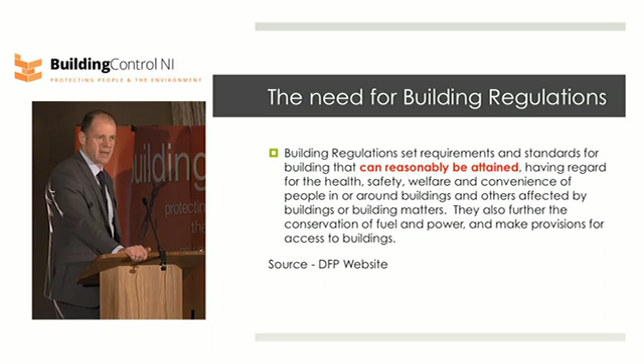So in terms of the need for the regulations, gospel according to the DFP - sorry Seamus, I know you're here with us today - but this is what the DFP say about the need for regulations. Building regulations set standards and requirements for buildings that can be reasonably attained, having regard to the health, safety, welfare and convenience of people in and around buildings, etc., etc., etc. It all reads very well, but there's one line I possibly have a bit of an issue with, and that's the bit that says 'can reasonably be attained.' That's a huge challenge for us in building control. It's a huge challenge for the construction industry - when do we be unreasonable, and when do we go into that area of being unreasonable? And that is very much subject to personal viewpoints as well.

I think we all understand the DFP definition, but it doesn't necessarily roll off the tongue very easily. What I'd like to do this morning is make this simple, because I think when you simplify things you get a better understanding and they stay with you better. So I'm going to look at the regulations in terms of three key steps.

Number one, buildings should be safe. By safe, the first thing I mean is they should be structurally stable. They should be safe in the event of a fire, and in terms of fire risk, those in the industry will know that over the last number of years, thankfully the numbers of people dying as a result of fires in buildings has reduced, but it's still up there at about 400 people per year.

Changes in the regulations over the last number of years have no doubt contributed to the safety of buildings. We provide heat and smoke detectors, we provide adequate means of escape, we ensure that materials within buildings are resistant to the spread of flame. Buildings are no doubt safer places because of the regulations, but there's still some way to go.

Even think of your own house at home, depending on the age of your house, it used to be none of your bedroom windows needed to be what we call escape windows - ones you can open fully to get out if there's a fire. The regulations introduced a provision that there should be one bedroom window that is an escape window. Now houses are built with all bedroom windows being fully escape windows, so much, much safer places to be for us all.

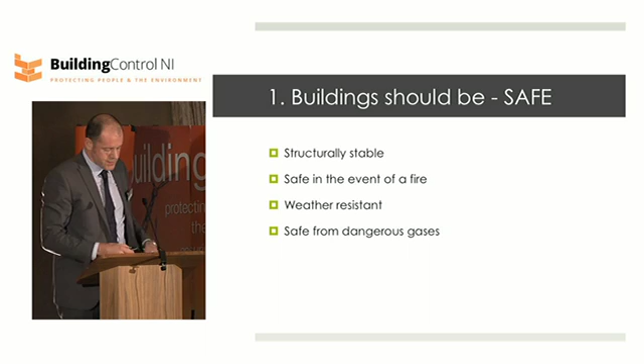The other one is carbon monoxide, and I think the whole issue of carbon monoxide detectors probably explains the benefit we have in building control from having strong elected member involvement. I think it was only for the involvement of elected members that the requirement to have carbon monoxide alarms is now provisioned within the building regulations.

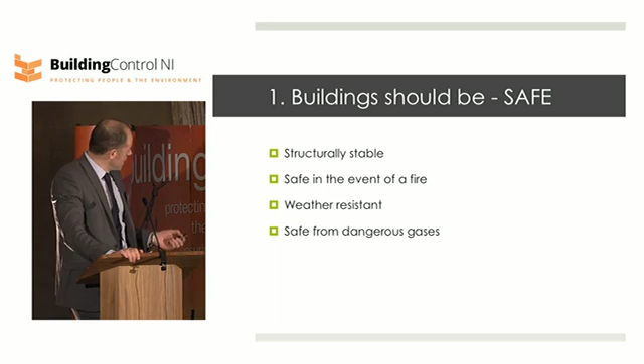What isn't in the regulations at the minute is that buildings should be safe from dangerous electrical wiring. Now that is a provision within the regulations across the water. We have resisted this for years in the north. Personally, I think it should be part of the regulations here, but that's just my personal view.

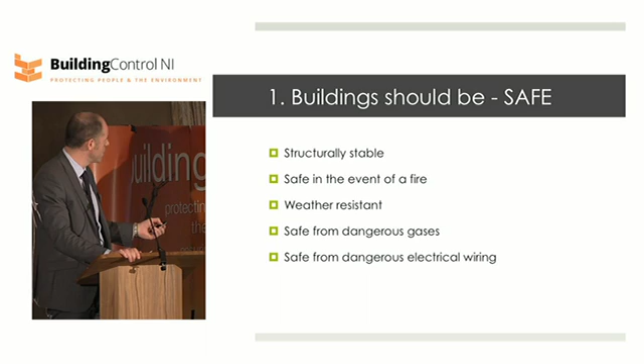Secondly, the second key point I'd like to make is that buildings should be accessible. Stairs, again, a huge source of accidents within the home - numbers running at about 500 deaths per year as a result of falls on stairs. That's a huge number, and it's quite hard to believe that 500 people are dying each year because they fall on stairs.

Regulations have improved the safety of stairs. Stairs, we would feel, are now much more gentle - the goings are longer, the rises aren't as high, stairs are not as steep, and they're wider than they used to be. But that figure is still way, way too high. There may be other contributory factors, but regulations have certainly helped make stairs safer in the home and in other buildings.

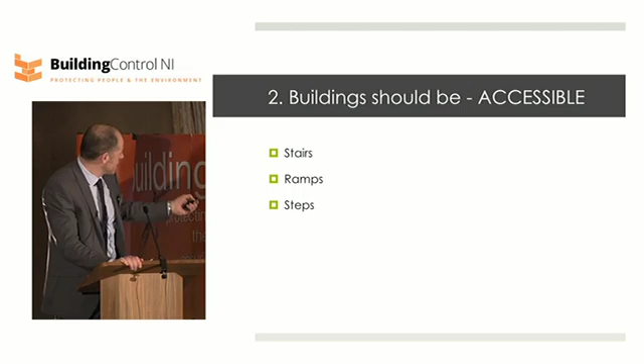Again, steps are more gentle now than they were. Guarding is a provision within the regulations. You don't need to be a genius to know that when you have a fall from the first floor down to the ground below, you need to protect that. You don't need the regulations to tell you that, but when architects come in with different materials that are aesthetically pleasing, regulations will tell you the strength and thickness this glass needs to be.

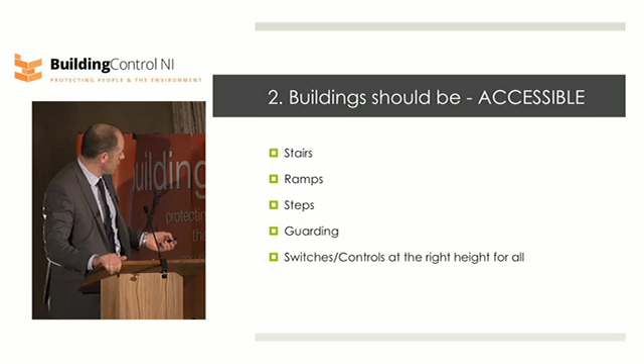So the regulations, while it's not obvious that it's needed for that solution, will keep you right and keep the home safer. Nowadays in buildings, our switches and controls are at the right height for everyone, and I think we'll all agree that's a good direction of travel, so those with mobility impairments can operate switches and controls the same way as all able-bodied people do. And finally, toilets and showers within our homes and buildings are now usable by all.

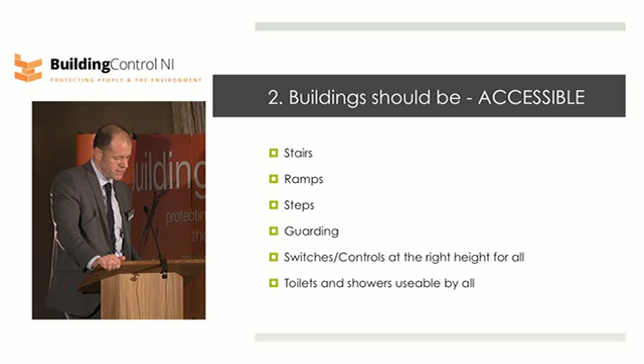I think we all probably know someone who has had to get their house adapted because of changes in their life. Unfortunately, because of some of the illnesses that are out there, people who require these adaptations don't even ever get to see them being built. I think that's been a problem historically, that the standards weren't good enough, and years ago we weren't building to the proper standards. The concept of lifetime homes, there's a lot to be said for that.

Energy efficiency, increasing cost of heating our homes. Even on the radio this morning, those of you who listen to Radio Ulster, our famed radio presenter has been running a few sessions of late regarding the struggles people have just to heat their homes. Deaths due to hypothermia have doubled in the last 5 years. Over three-quarters of people admitted to hospital with hypothermia are over 60. This is a real issue in society, and building regulations have helped to make our buildings more energy efficient.

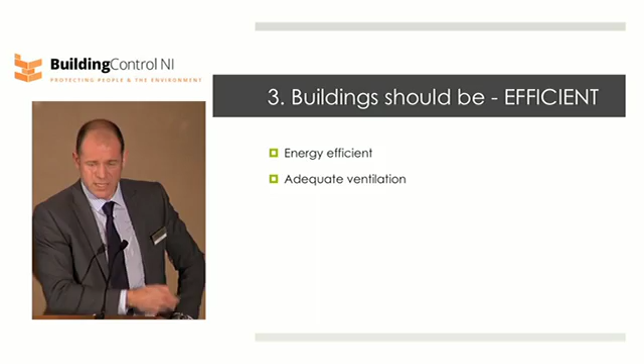Ventilation as well helps the air quality within the home. Personally, I think we're getting a wee bit carried away with the whole ventilation side of things. The size of vents now that we're asking people to put into their homes just to meet the ventilation standards, I think it's going over the top. Eventually what happens is people cover up those vents - you get a draft coming into your house, you cover up the vents. Old buildings naturally vented themselves much better, but our ventilation standards are getting very complex and very demanding.

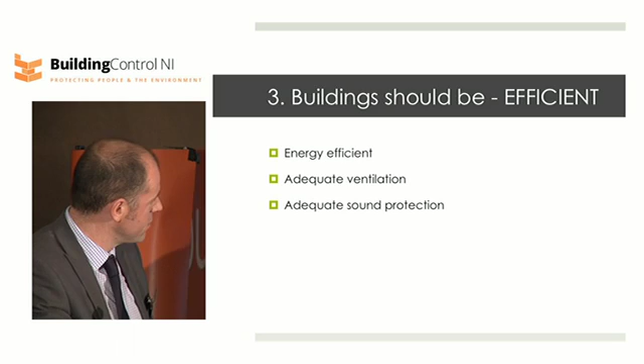One of the increased provisions in the new regs is sound protection, and I think that's very much welcome, particularly for those who live in dense urban areas, semi-detached homes, and flats. Okay, some of the problems - bad press.

Okay, fair enough, that's strictly correct. Ratepayers' money does go towards the building control service, but it's 1% of a typical council budget. 1%, yet it's the first thing that's listed in the rates booklet. So, an issue that I think needs to be addressed. I think there are bigger elements of council expenditure, other than building control, that go unnoticed and untalked about.

This is becoming a real issue in the building industry: the cost of construction. While regulations are improving a lot in terms of safety and energy efficiency, it is having an effect on how much it costs to construct buildings and homes in particular.

Take the case of homes. An article out of the Sunday Times in October of this year termed it the next big property crisis. It states that the drive towards improving energy efficiency and trying to make homes and dwellings zero carbon is really pushing up the cost of construction.

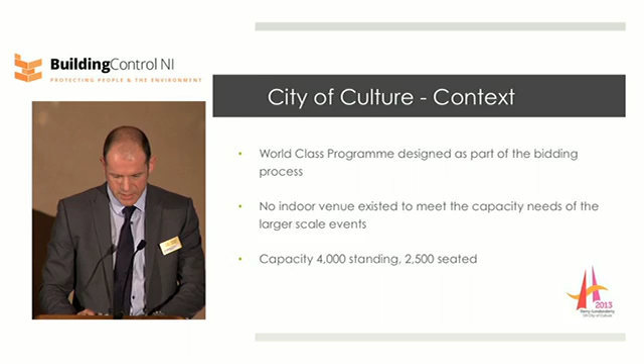So the powers that be came to me one day and said, we're thinking of building this temporary structure, it doesn't need building control approval. I said, well, why have you made that assumption? They said, well, it's a tent. I said, well, it's not really a tent, because I'd had sight of the drawings. I said, a tent has poles and it has stays, and this isn't a tent - you can't tell me that's a tent. He says, well, it's a marquee. I said, well, technically speaking, yeah, you could say it's a marquee, but it's one hell of a big marquee.

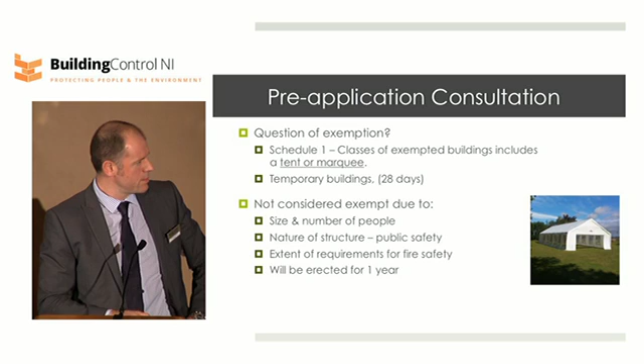This thing was 80 metres by 40 metres - a huge temporary building. Then they came back to me and said, well, okay, but it's only going to be there in a temporary capacity for a year. I said, it's going to be there for more than 28 days, it needs an application. They said, well, it's only going to be used on so many occasions for so many hours, and if you add all that up, it doesn't come to 28 days. So they were doing everything they could to say that this didn't require an application. But knowing the size of it, the scale of it, knowing the risks and the dangers that could happen when it's full of excited young people, I said no, you're going to have to apply, particularly because of those risks.

So the application came in, and that's when the fun started. Thankfully I had Damien McMurray, Group Officer, David Glenn, a structural engineer within Derry City Council, who were able to assess it, and I had John McDade, who was able to advise on the safe numbers of occupancy before we could issue a licence to the organisers. So they ended up coming up with a solution - a temporary building of very, very lightweight construction.

The building is only designed for 75% of the wind load - normally, obviously, we design to 100%, so this building is only designed to take 75% of what a permanent building would be able to take. So we said, right, you're going to have an on-site anemometer to record wind speeds, manage the risk, and you're going to have to introduce trigger levels - if wind speeds go above 52 mile an hour, everyone's on alert, and if wind speeds go above 60, you close your gig and get everybody out. So thank God, touch wood, that hasn't happened this year yet, but there's still about 6 or 7 weeks of the year of culture to go. We haven't had to evacuate anyone yet because of wind, but it was a risk - it was a risk we had to take.

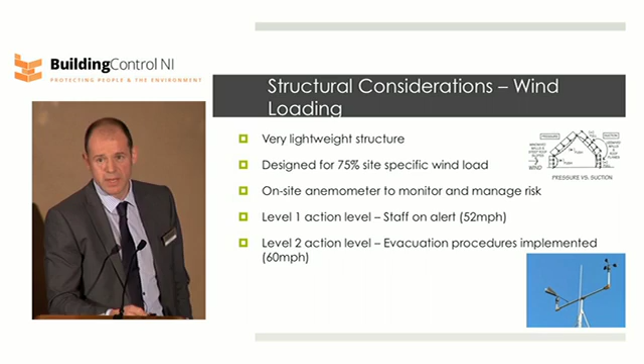In terms of fire safety, somebody - if you want to talk to Damien McMurray about the fun we had with this one. The contractor wasn't terribly interested in the fire safety issues. We had a real battle with them to get them to a position where we were satisfied that the occupants would be safe. I know it's a relatively simple building, but we still wanted to make sure the escape routes had fire protection, and that the alarm system and the lighting was up to standard.

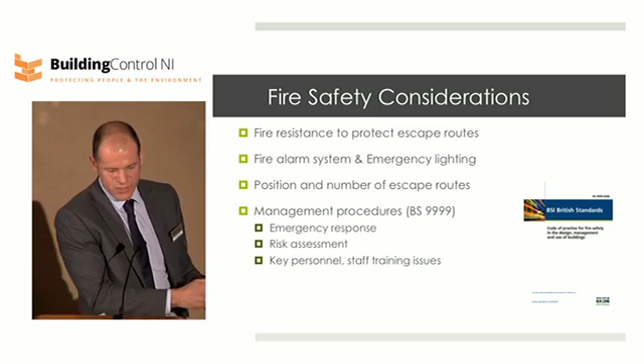Adequate escape routes, and in terms of management - this is where a lot of these things fall down, on human factors and how the building is managed. I think, other than having to almost write the thing for them, that's how little they seemed to know about fire safety management. It was a concern, but we did get there.

Energy conservation I wasn't terribly concerned about. I was concerned about fire safety and structural stability, but it was only going to be there for a year, so if it wasn't the most energy efficient building in the world I wasn't that particularly perturbed. But it wasn't within my power to relax that part of the regulations. We have powers to relax certain provisions, but I couldn't relax regulation F3, to do with energy efficiency.

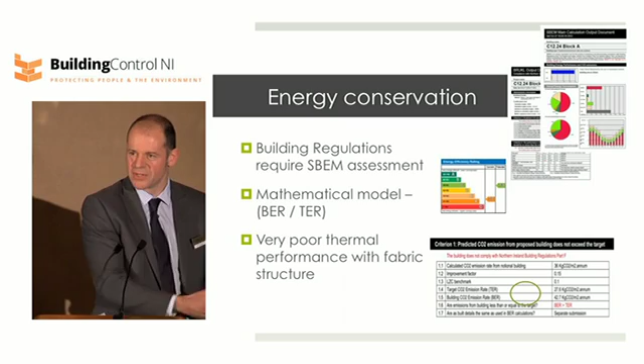So when the calculations were done, the building emission rate didn't perform in terms of the target emission rate, so it failed, and I had no choice but to refuse the application. Luckily, because of the very good relations we have with DFP, I was able to speak with DFP Building Standards, explain the problem, let them know I had to refuse this and it was going to be sent up to them, and we needed them to turn their analysis around very quickly, which we managed to get sorted.

Just a summary of what Building Control did. The application was lodged on the 3rd of September 2012. When it was assessed, there were 71 issues highlighted that needed to be addressed, and it went to and fro for weeks to get revised drawings and additional information.

I issued a rejection notice on the 13th of December last year based on the energy efficiency issues, which I had to do under Part F. I got a direction from the Department of Finance and Personnel to go ahead and issue approval, which I did just before the Christmas party on the 20th of December last year, for the drawings.

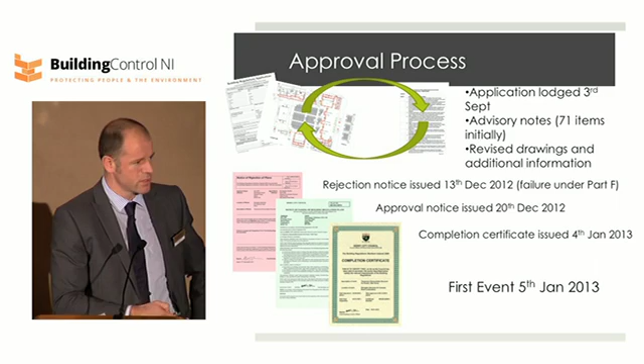So over Christmas, while I was sunning myself somewhere, Damien, David Glenn, and John McDade were out on site doing the final inspections to make sure the completion certificate could issue on the 4th of January, prior to the first event on the 5th of January. That place would not have been opened, and it wouldn't have been as safe or as accessible as it was, but for the work of Building Control. I'm sure no one has heard anything about Building Control's role in City of Culture.

Another one, Turner Prize Gallery. I could go into a lot of detail about this one too, but the Turner Prize, out of England for the first time in its history - a very prestigious contemporary arts prize. You should go and see it for a laugh if nothing else. Well, you can tell I'm not an arty person.

Buildings 80 and 81 at Ebrington Barracks were out of use since the military left a few years ago. These were brought back into service for this year. Building Control again required applications to go through all the approval processes, and Building Control staff were integral to getting that building opened on time. It's hoped that in the 10 weeks of the Turner Prize Gallery being in Derry, about 70,000 people will pass through that building.

Just bringing it back to the subject of the conference - future challenges that we face as an industry will bring change, and the change we need to bring will bring challenges and opportunities. Number one, I'll just throw this out - I'm not going to dwell on it too long - but who should write the regulations?

Currently within DFP, and DFP have done a good job over the years - we've had a very good relationship with them. I'm going to speak personally: I just feel they're a bit isolated in DFP. I'd rather see them in DOE, but that's not within my gift to sort out. Maybe at some stage the writing of the regulations should come into a branch of local government.